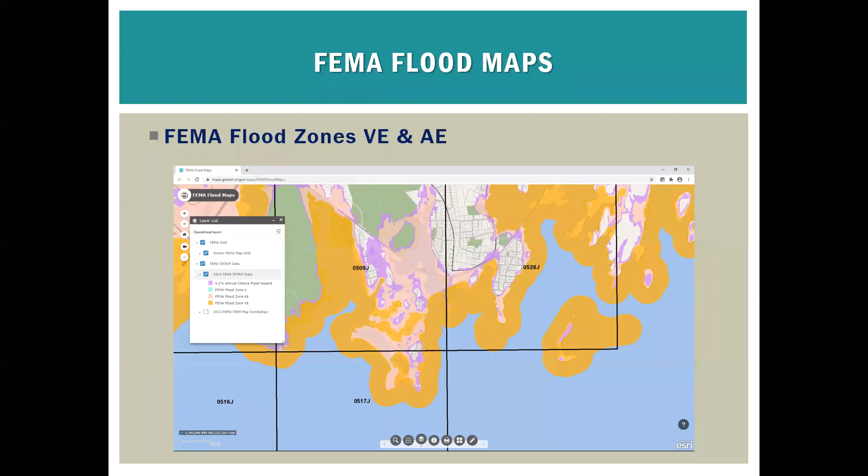You see FEMA zone VE, FEMA zone AE. So what are these things? Primarily this is Groton Long Point. Here's your Groton Long Point Bridge. You can see primarily we're in zone VE and zone AE.

FEMA zone VE indicates a coastal high hazard area. It's inundated during the 100-year flood and is subject to high velocity water, including waves with wave effects of 3 feet or greater.

On FEMA's maps, the elevations given reflect a combined influence of what we call a still water flood elevation and wave effects. So when you look at the FEMA map and it says elevation 12, elevation 17 in these VE zones, that includes wave effects.

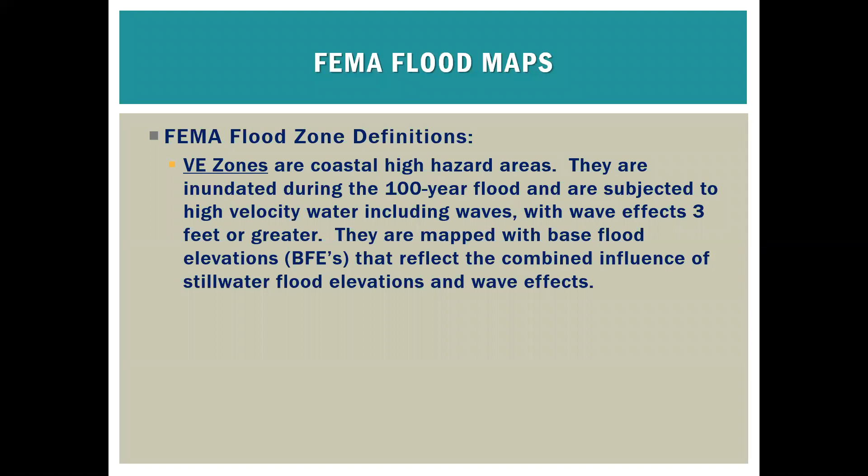Zone AE generally extends from that VE zone inland to the limit of the 100-year flood from coastal sources. Zone AE is also subject to wave effects, but less than 3 feet, and the mapped elevations do not include wave effects.

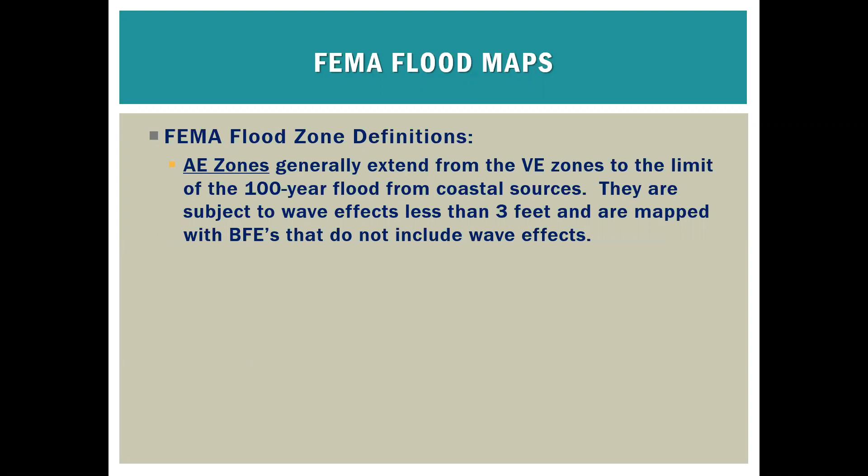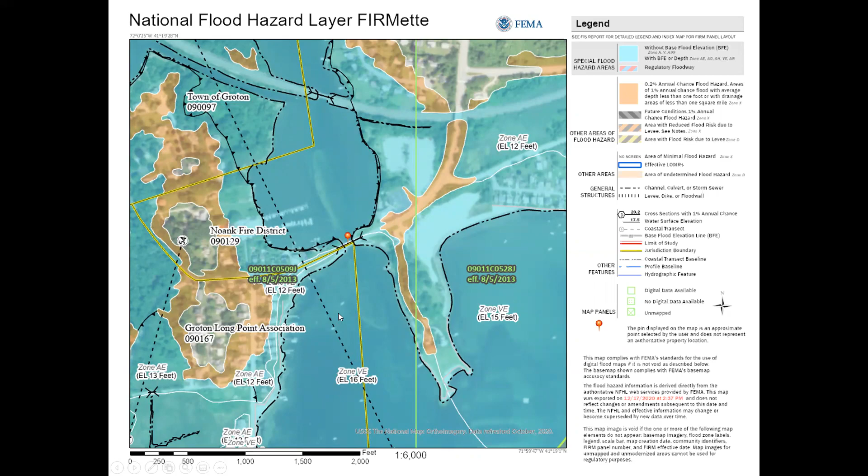So this goes toward our hydrologic and hydraulic design criteria. Since we're looking at federal local bridge program funding for this project, we'll have to use CTDOT design criteria. Going into the CTDOT drainage manual, the design criteria is based on the size of the watershed. In this case, that's just over 4 square miles, which makes this an intermediate structure, and it has to be designed for the 100-year return period.

The requirements are for the 100-year flood, which is like the still water elevation, and does not include those wave effects. They're looking for 1 foot of freeboard for the roadway. Freeboard is the distance from the top of the water to the top of the roadway. And they're looking for 1 foot of underclearance for bridges, which would be from the low point on your bridge to the top of the water.

This typically leads to kind of a perched condition for a bridge, where the bridge is up higher than the rest of the roadway. So if you satisfied the 1 foot underclearance, you've got the 1 foot freeboard taken care of at the bridge. Now your roadway may dip down further on the approach, so typically you might have kind of a hump of a profile where the bridge is up higher than the rest of the roadway.

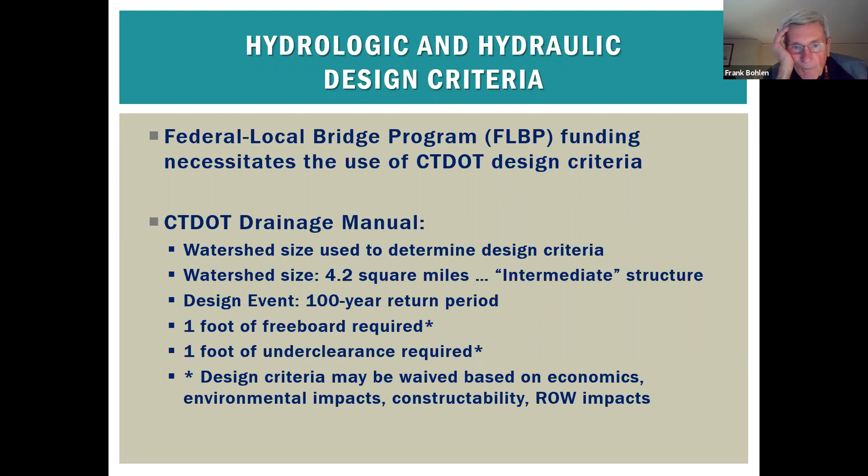There's no mention made so far of sea level rise. I haven't, but I will talk about that later on. It's important to note that the design criteria can be waived based on economics, environmental impacts, constructability, and right-of-way impacts, which are going to come into play here.

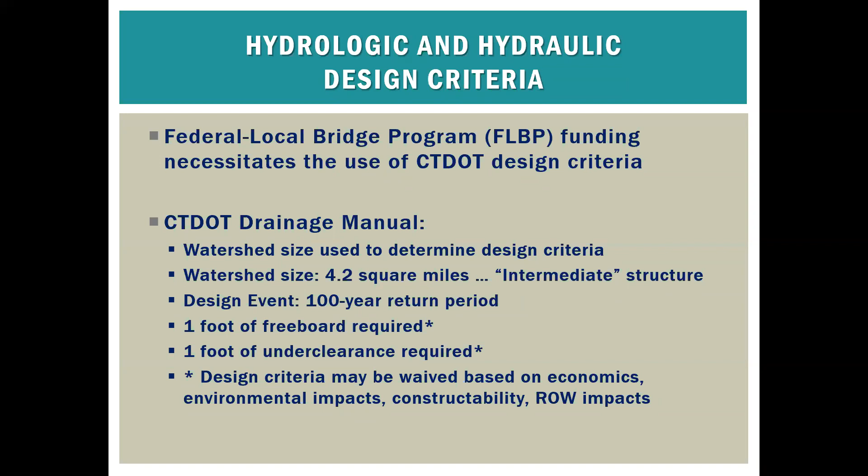Looking at the latest flood insurance study, the 100-year still water elevation is at elevation 9.7 at the bridge. That would be your control for freeboard and for underclearance. Wave height is over 7 feet, and peak wave period just over 5 seconds. Those come into play for the causeway riprap protection. They don't affect the bridge design or the clearances.

The recommended sea level rise from the Connecticut Institute of Resilience and Climate Adaptation is 20 inches by 2050. They have kind of a graph of projections, some conservative and then more and more unconservative. The end result is this is their recommendation, 20 inches by 2050.

That's a state requirement now, isn't it, John? It's a requirement to consider sea level rise. It's my understanding that the state of Connecticut requires designs to accommodate 20 inches of sea level rise by 2050. Yes, there is an act, by law, or an act, whatever it's called. Yes, there is an act.

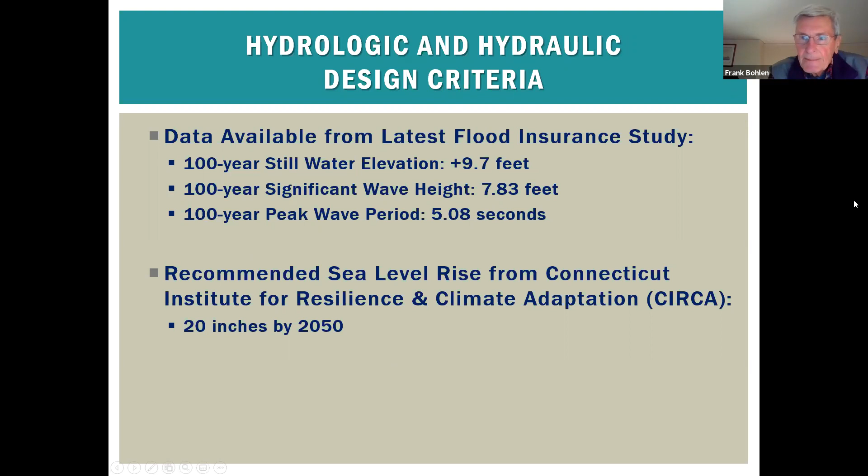And are all the elevations NAVD 88? Yes, these are NAVD 88. Thank you.

Okay, going into our concept plan development. As Greg mentioned, this project has been around for a bit. We wrote a type study back in 2013. At that time, we considered different options for the bridge span length and the sidewalk configuration.

At that early time, it was thought that a superstructure replacement might be the best option, because it was an economical option. So in 2015, we followed up with a type study that further developed the superstructure replacement options. But notably, a superstructure replacement, which would set the structure on the existing abutments and just replace the beams and the deck, would not meet the hydraulic criteria we were discussing.

Generally, a superstructure replacement would be waived from that criteria. But it would not give you the resiliency that you are most likely looking for, because you would not be able to pick up the low chord of the structure. You would not be able to do much with the profile of the causeway.

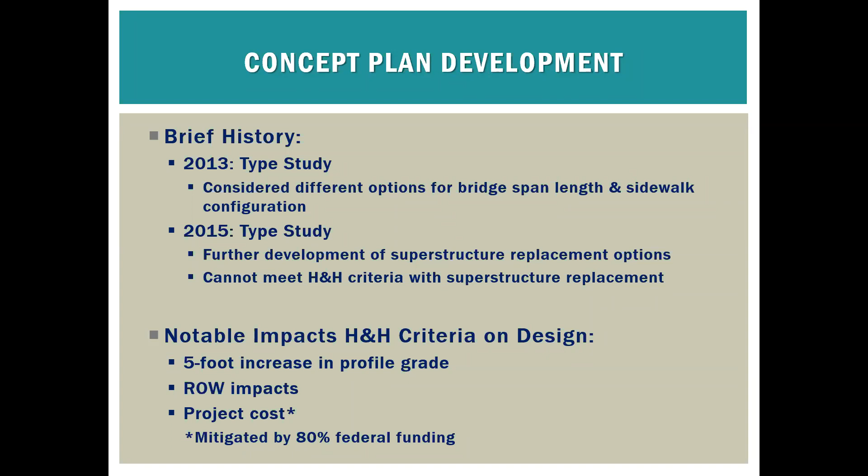So taking a look at the concept plans that Jim was working on here. These are the project limits, going from East Shore Ave on the west out to the beach here on the east. I know the picture is a little small here.

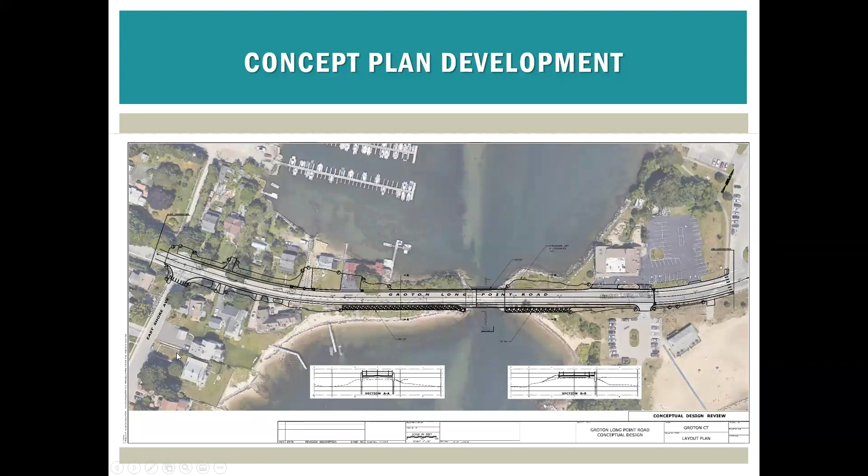We did have a profile to go along with the plan view. The upper line here, which I know it's not very legible, is the proposed grade. This lower horizontal line here is existing grade. And the difference between the two at the greatest difference is on the order of 5 feet.

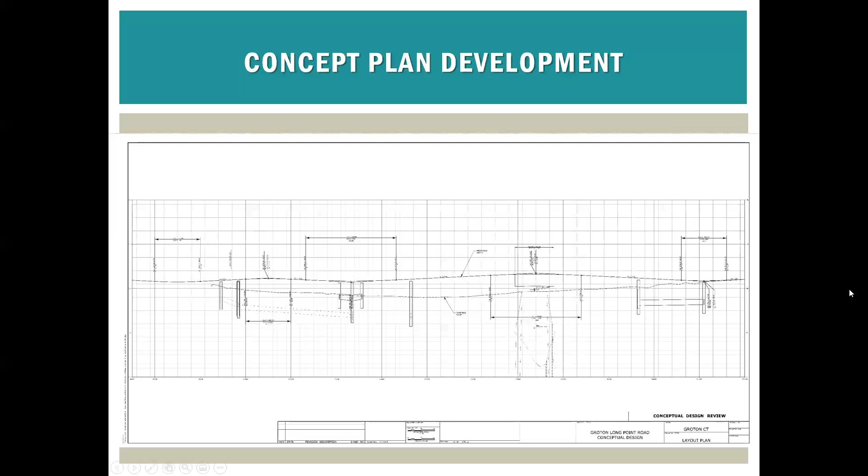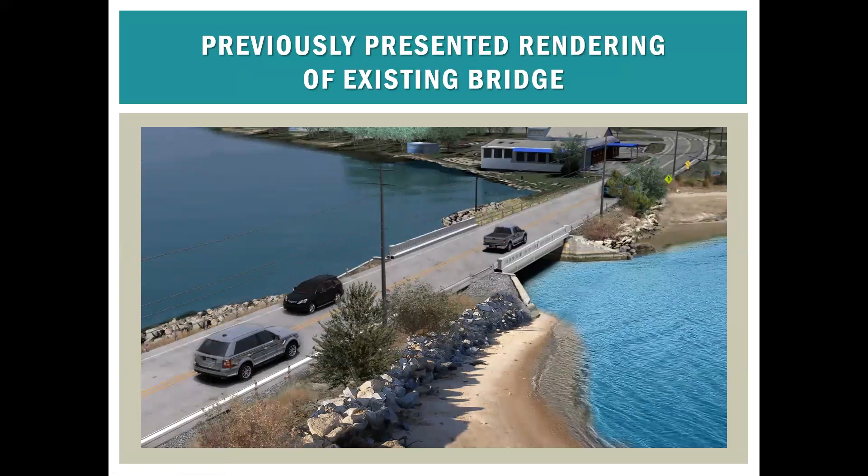I just want to take a quick look at the renderings, because I know you've seen these in the material that Jim's presented in the past, where this is the existing bridge. And he had shown this rendering of the proposed bridge. I just want to make it clear that these renderings were done before the profile had been advanced to incorporate the resiliency criteria. This does not show a 5 foot increase in profile grade.

So your condition with that change in grade would be much more of a perched structure. You have a much larger crest vertical curve going over the bridge here.

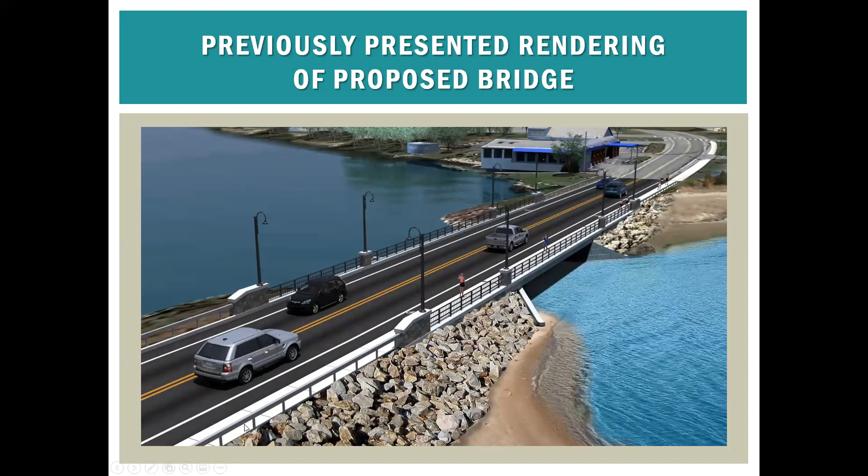This is a typical bridge section from an earlier type study. It's just showing that we would be adding a sidewalk on the bridge, similar to what's shown here. Now, how far that sidewalk goes toward Groton Long Point is up for discussion.

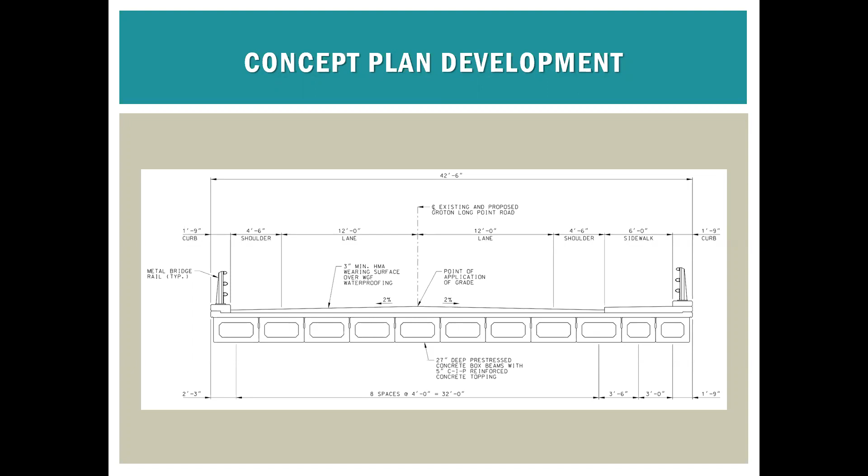But it's important that you incorporate the sidewalk on the bridge because that gets the sidewalk funded through the program. Otherwise, you get a separate sidewalk bridge, as had been discussed some time ago, that would not qualify for federal funding through the program, that 80% funding. And that bridge width does increase a bit.

That helps you with the stage construction while you're trying to maintain at least alternating one-way traffic during the first stage of construction, when you're removing a portion of the existing bridge while maintaining traffic on the existing bridge, building half of your proposed structure, shifting traffic, alternating one-way traffic onto the proposed structure, and then completing your new bridge.

We had shown early on a temporary pedestrian bridge. Whether you choose to maintain pedestrian traffic through this location during construction is a town decision. I will point out that the length of the section where you're going to have alternating one-way traffic is on the order of 300 feet. So if someone is walking along that roadway with the alternating one-way traffic, it's a bit narrow not to have some type of pedestrian accommodations. Again, that's a town decision.

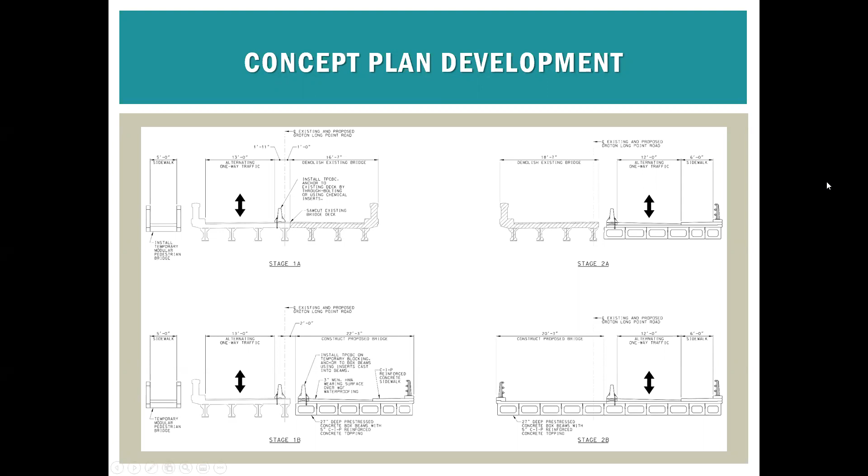So looking at the next steps, I think we need to make a decision about the causeway profile, knowing what the profile implications are, and maybe we can discuss those a little bit further. But we have to decide whether we're going to try to meet the full CTDOT hydrology and hydraulic criteria, or pursue a waiver for some of the criteria.

For example, you may decide that as long as the causeway and the roadway are dry, you don't mind if the bridge is under pressure flow, where the level of the water comes up above the bottom of the girders. So that type of middle ground decision would let you decrease the right-of-way impact a bit.

And that's kind of a major decision that I think will come out of this task force committee. Once we make that decision, then we can continue with the preliminary design, construction cost estimate, hydrology and hydraulic reports. And then you can move on with your referendum process and your federal local bridge program application, because you'll have a good handle on the construction costs and the coordination that's going to be required with ConnDOT, specifically the hydraulics and drainage people there who you'll have to get the buy-in from if we're going to try to waive some of their criteria.

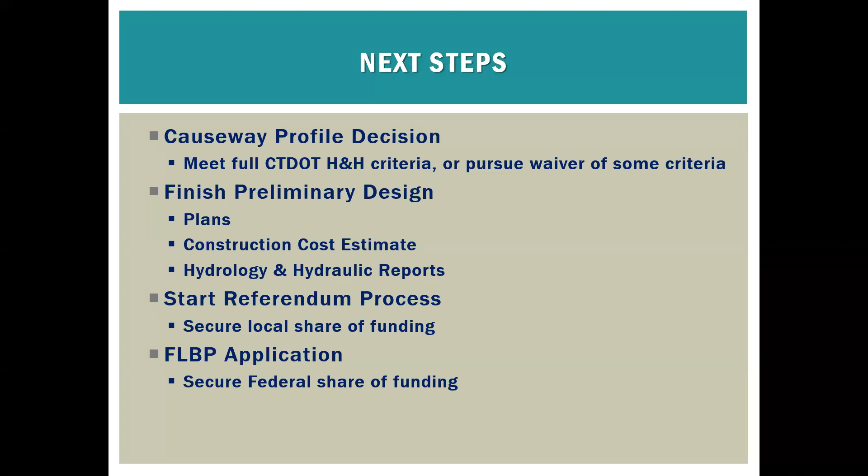And looking again at the timeline, we were looking at finishing preliminary design in 2021, and then moving on with your referendum process. And this hasn't changed. That timeline is still fine. So I just want to point that out. There's no reason on the design side for any type of delay, as long as we can make some decisions on this critical layout item. So with that, I'll open it up to discussion and any questions that anyone may have.

John, I don't know if you have it there or not, there's a March 17th, 2020, all the elevations for the existing and proposed bridge, proposed causeway. I think that gives kind of a good picture of what you're talking about. It's from the last task force meeting. I might have it if you want. I can. I believe I have it from the last presentation.

So I have a few questions, Greg. Yep. I may not have heard, I'm sure I didn't hear. What's H&H? Hydrology and hydraulics. Oh, I should know that, right? Never heard the term. Okay. That's what they refer to it as, so I'm trying to be consistent.

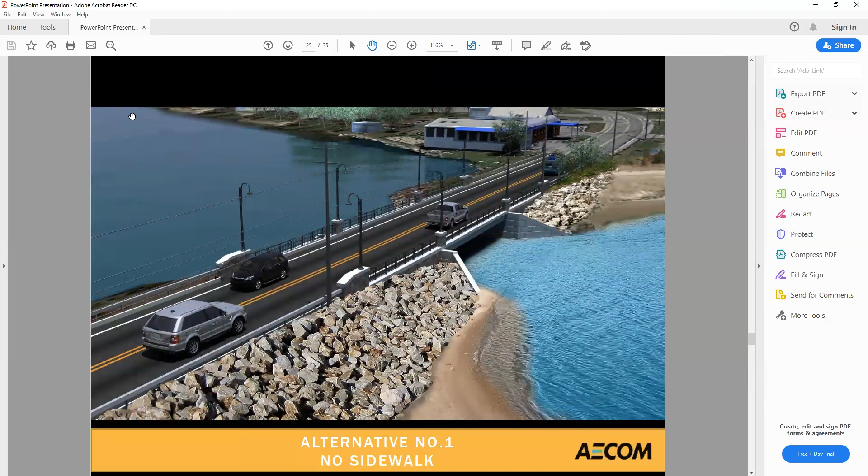Can you see this on my screen? Yep. Okay. Right. Oh, yeah, that one, exactly. That's the one, with a separate pedestrian bridge. You know, a lot of times people like this boardwalk kind of look. But this isn't really showing a structure holding up the ped bridge, but there's got to be structure under here. And if you want that pedestrian bridge structure to be funded under the federal local bridge program to get that 80% funding, it has to be part of the bridge for the roadway. They will not fund a separate ped bridge.

Right. And another detractor to this alternative is that the town would have to maintain that boardwalk. It looks like a maintenance headache to me, and I don't have to maintain it. I may have to pay for it, but I don't have to maintain it.

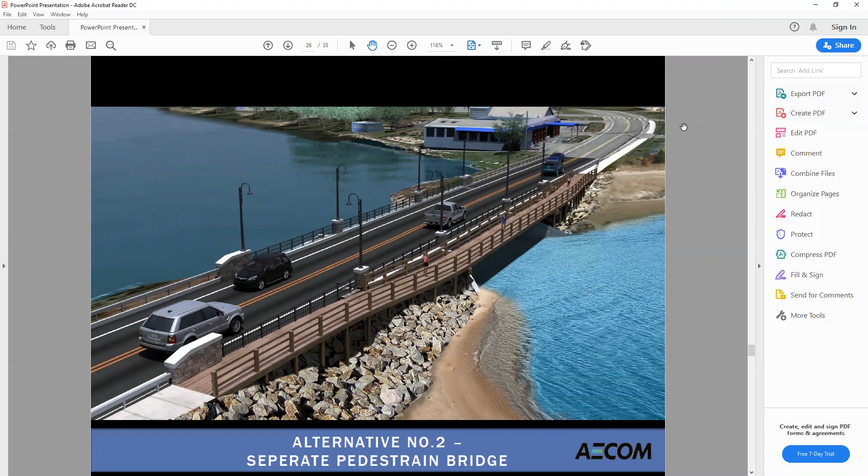And also, one thing that you want to have in this somewhere as you present this, we're talking about a design life of something around 100 years, right? Yes. I could be wrong. Federal criteria is at least 75 years for a roadway structure. Right. The old one's been in there quite a while. So we're looking at something like 100 years, and 100 years of a wooden structure is iffy. That looks fine.

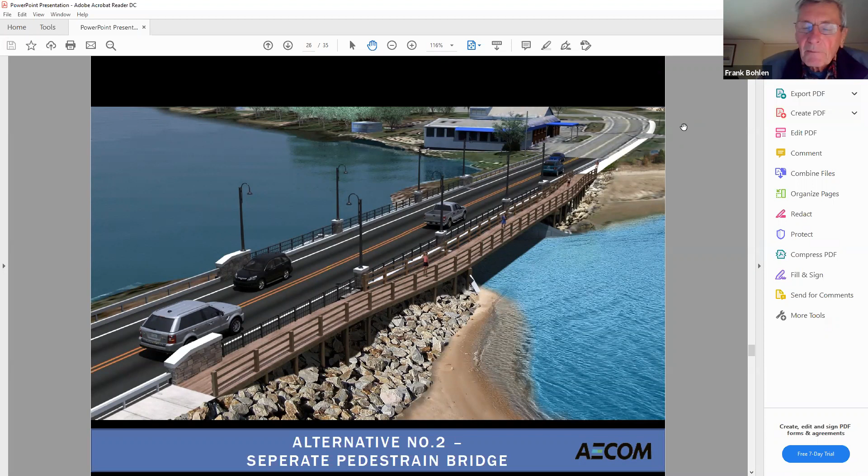Now, it was not clear to me. Let's go back to the one you showed me. When I looked at some of the paperwork, this road is quite a bit wider than what's there right now. Not just a small increase. Is it 10 feet, 25 feet? More than that. You got a sidewalk, you got what look like two bike lanes, and then you've got something like 30 feet or so of roadway out there. So it is quite a bit wider, right? Yeah, incorporating the sidewalk does cause quite an increase in the width. We're looking to bridge over the existing abutments and support the new structure behind them.

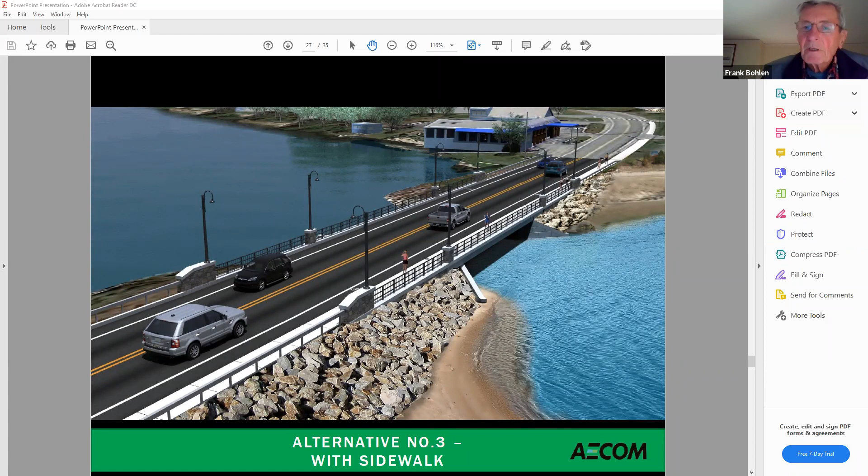I think this rendering was created to convey the look from the roadway, and it doesn't really convey the support of the structure accurately. I'm going to try to go into my material here and see if I can answer your question on the width. And if I recall correctly, when Jim presented this, he was also presenting something about the supports, and that the new bridge would require different support mechanisms, a different support structure, right?

So our intention would be to remove the existing deck and beam and cut down the abutments to an elevation we'll have to decide on, but say where you can see where the water line is on the existing abutment here. Mhm. That's just the tip from the typical tidal water. So that's probably your high tide line right there. Yeah, it is. And we'd like to cut the abutment off probably at that location, so when someone is coming through here from the marina, they can at least see the top of the existing abutments and not hit them with their boat.

And then we'd build new abutments behind the existing structures, so we don't run into the existing foundations. So that's going to require a span length over 80 feet, somewhere between 80 and 90 feet, which you're going to be back here with the proposed abutments. So then the new bridge will be longer than the existing bridge.

Right. Now, talk to me about the underbridge clearance. I heard you say initially, or at least I thought I heard you say, that that was required, a foot of clearance at storm level elevation. Right. Is it required or desired? Well, the way that the CTDOT hydraulic and drainage manual is written, they say it's required, but they say the requirement can be waived if it's unreasonable to meet the criteria based on economics and right-of-way and environmental impacts. So if you don't have a substantial reason why you can't meet that criteria, they will enforce it. Do we?

You could argue certainly that when you look at the cross sections and you look at the property impacts, I'll go back here on these nearby properties, you're trying to increase profile grade by 5 feet in this area here. And you look at the slopes and how far these slopes come on these properties, what the grade of the driveways become when you are picking up the profile that much. You could certainly argue that you're impacting that property so much that it's not reasonable to provide that underclearance. Right.

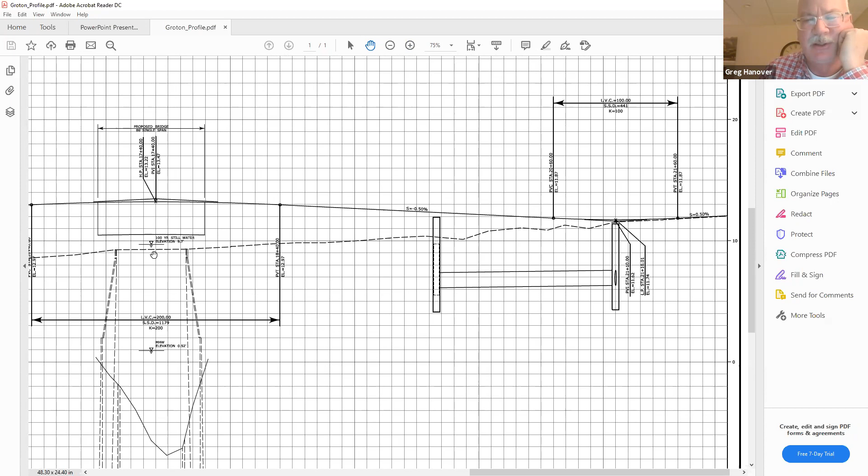I can open up a better view of that profile here. It's around 9.2, I think. Say again, Greg? It's around 9.2, the existing bridge. Yeah, so that might be a little low for the 100-year storm. Yeah, because 100 years, 9.7. Right. Yeah, the low point is actually in front of that house that he was just showing. Yeah, it looks like it's close. Yeah, certainly within a foot of being dry.

Because of course, in our consideration now, the resiliency task force considerations, we were looking at the wet on either side in 100-year, and talking about raising road elevations all the way along to accommodate the 100-year. But of course, recognizing that, we got a nice dry road now from beyond the Fisherman Esker Point over to the stop sign going into Groton Long Point. And at that point, you go uphill a little bit into Groton Long Point. It's relatively dry into the pond on the other side in the 100-year flood, as you showed. So

the roadway elevations in this area is an interesting one. When you showed me that picture of a 4 or 5 foot elevation, and you showed me blacktop that sort of ended maybe short of the fisherman on the east side, I was thinking about why, beyond the cost, of course, it wasn't extended further east and the same thing further west. But of course, the properties, particularly on the west side, are certainly a consideration. And I'm sure they'd feel that way.

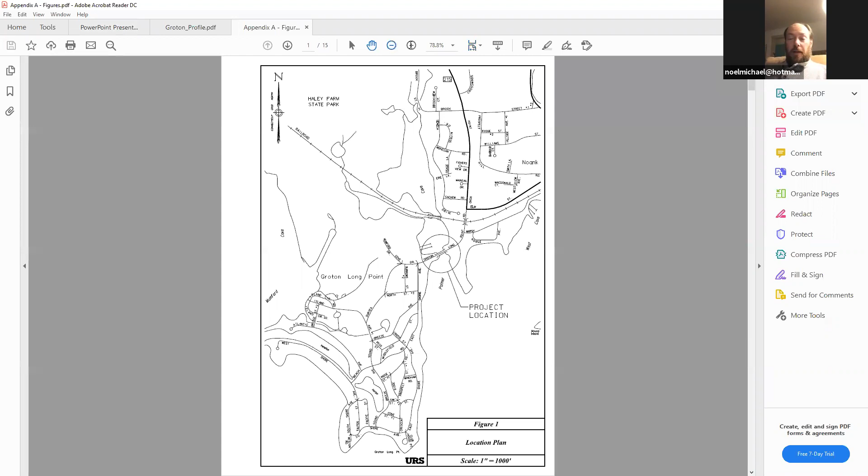Okay. I see Noel Michael has a question. Hi, Noel Michael here. I also echo Andre's recommendation for the sidewalk. It'd be nice to have it on the south side, extending all the way to East Shore Road there, Groton Long Point.

I also had a question about the width of the passage of water under the bridge. If you put the new supports out wider, what did you say, 80 feet? Weren't we talking at one point about increasing the water flow through there? So wouldn't it be a good idea to remove the old abutments after, just to make a better flow situation? That's all, just a comment. Well, I can discuss that.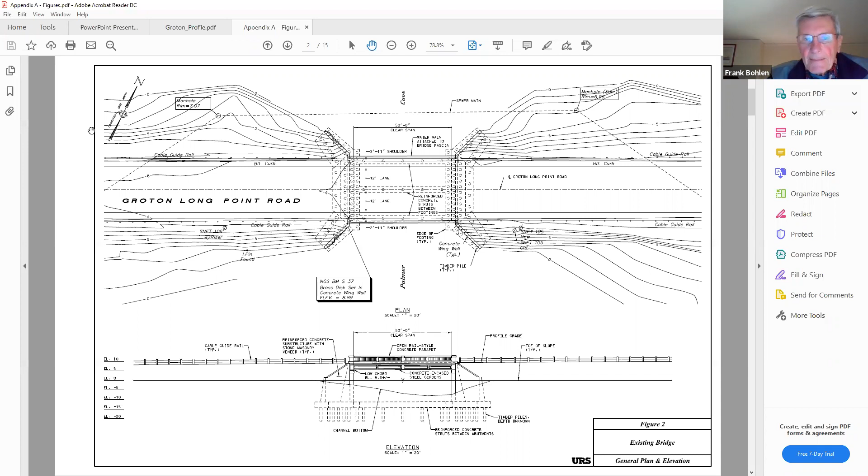To what extent is the finished channel width going to be determined by the hydraulic studies you're about to perform, right? Why wider? I don't think that there's a hydraulic need for a larger opening. I know that the concern with possibly opening this up before, as is shown in this study as an option, was we were looking at even a 3-span bridge. There was concern about wanting to flush the cove, so to speak. And I remember at the time there was also a competing concern. I think there were oyster beds in the cove, and some people didn't want it to be flushed. So I know that there are thoughts both ways, and the easiest route is probably to leave it as close as possible to what it is now.

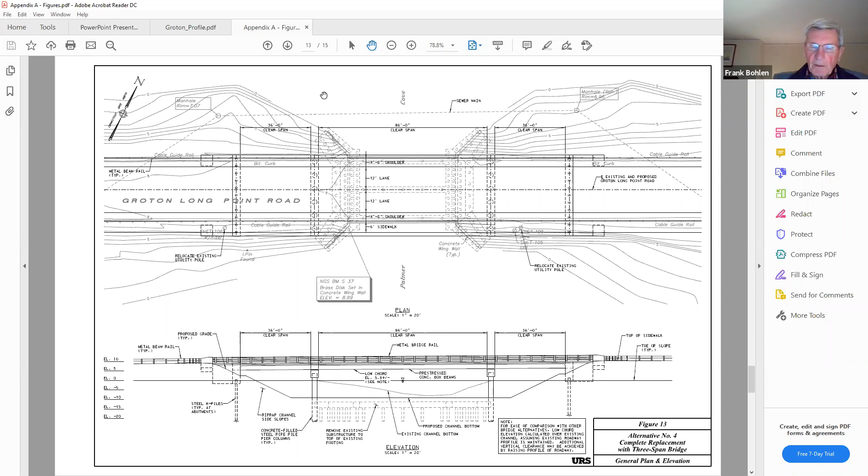But you're making it wider, right? Well, we're building the proposed abutments behind existing. Yes. It ends up being a small change. It would be a little bit wider. You're still gonna have some kind of riprap protection in front of them, even if you remove the existing abutments down as far as you possibly can, which would be, I would say, not below the existing footings.

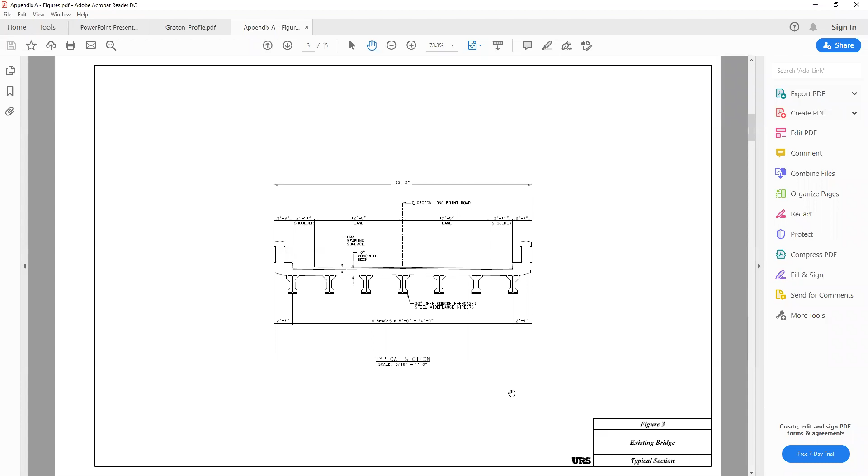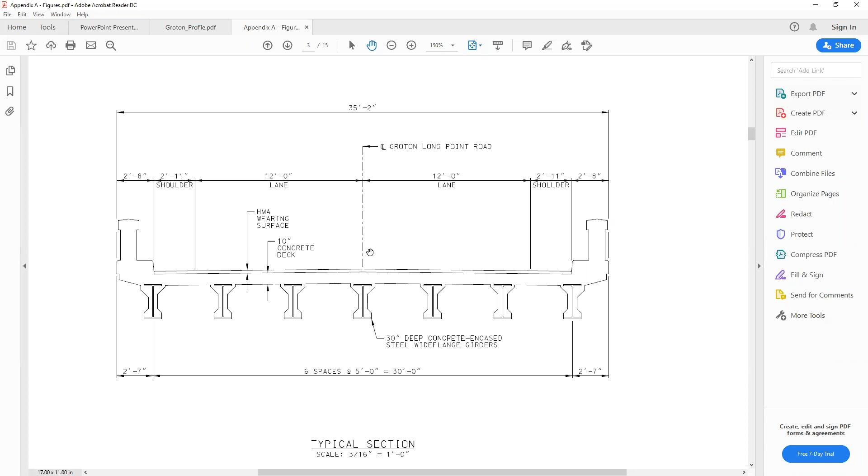And to go back to that question about width, here's the existing bridge. So right now, I believe we have 12-foot lanes and almost 3-foot shoulders. So there was a small increase in shoulder width on the proposed bridge. I think we were up to 4'6". And then we did have the addition of the sidewalk. So it's 35 foot 2 inches out to out now. And on the typical section that I showed you, which was from this early study, 42'6".

If you incorporate bike lanes, typically they're recommended to be 5 feet. If you had a 5-foot bike lane, or even let's say a 4-foot bike lane and a 2-foot buffer, and say an 11-foot lane instead of a 12-foot lane, it's 11 and 2 and 4, 17 foot. Okay. You got a 34-foot wide roadway. Going to bike lanes is going to put you a little wider. If you didn't have the buffer, or you could stripe it differently, I guess. You could stripe it as a bike lane instead of as a shoulder. Just add the bike markings. There are options there. We can work with you on that, but it's gonna be wider.

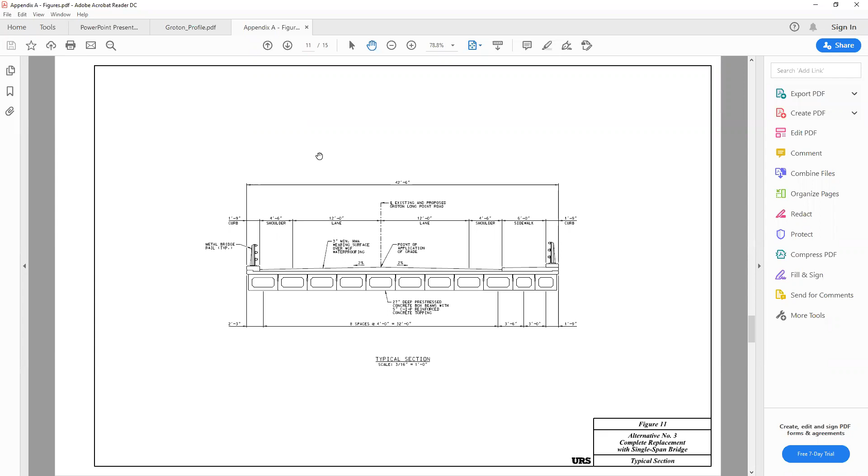So John, did you have that elevation sheet? I think you pulled it up real quick. I saw it there. It should flick by.

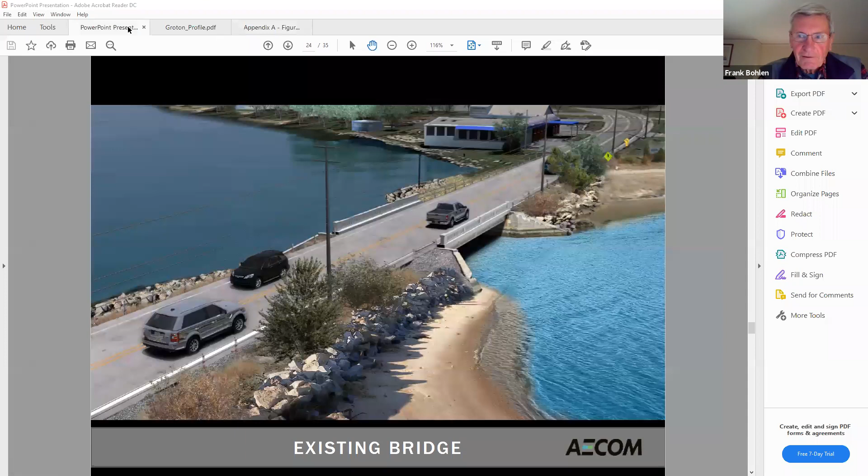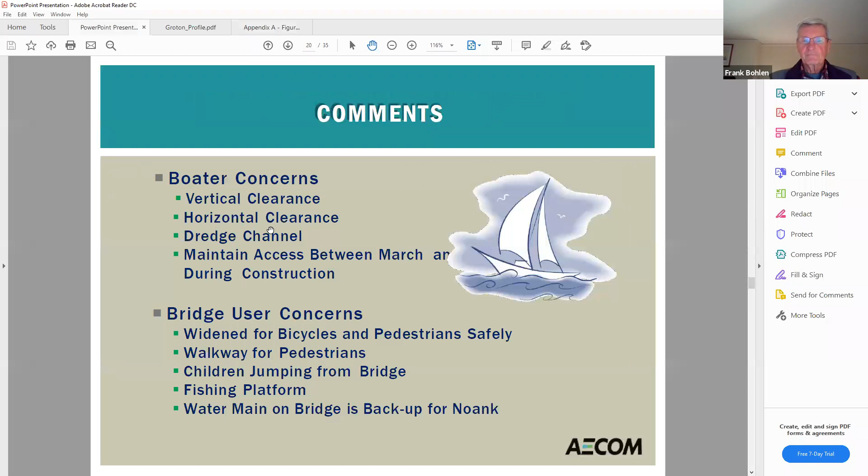Existing bridge with 50 feet. Yeah, proposed bridge with 86 feet. You're gonna have to forgive Jim for that one. He's talking about length. That's the span. It took me a while, Frank, to figure that out too. It's the width if you're a boater, I guess. Yeah, okay. I don't know. Okay. So yeah, that's not the width.

You know, I think without getting too much into the elevations, the most important thing I think is how much profile grade is coming up. That 5 feet. 5 feet is a substantial increase in profile. We're talking about having a wall along the ocean side, the seaward side,

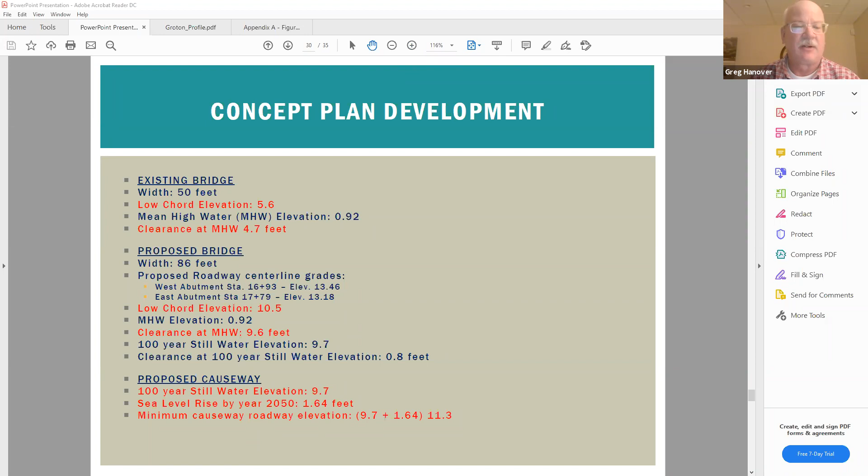Yeah, these are the first two houses on the north side as you come into Groton Long Point. Those two there, they're going to be really impacted by this elevation change. So I think it'd be helpful if you could give some cross sections or some simple illustrations to show the task force what's going to really happen there if we raise this causeway up to 11.3 feet.

Yeah, I have seen an early cut at that, Greg, from Jim, but I want to take a closer look at it. I'm not sure that the profile comes up far enough to incorporate the structure depth that we need, and I'd like to look at it a little closer before we present it. Yeah, I think it's just those first two on the right, on the north side as you come over the bridge. I think the rest of them was fairly minor grading.

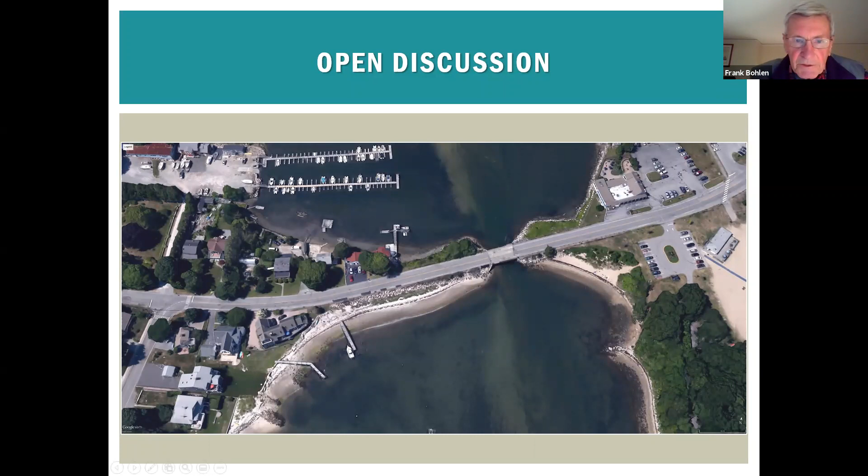Right. But of course, those two houses in the 100-year flood are probably going to be underwater. Underwater, exactly. So they might also be thinking about raising house elevation at some point in all this. Can we drop back to that slide you had with the text on it? I'm not clear on a couple of things. That guy. The low chord.

Bottom of bridge. The bottom, that's what I hit my head on when I go under the bridge, right? Okay. So where did you decide that you needed clearance at mean high water of 9.6 feet? I think when Jim worked this up, he was looking at that 100-year still water elevation of 9.7. No, hang on. We're not there yet. What I understand is under normal circumstances, at an average high tide level, I'm going to have 9.6 feet.

If my feet are in the water, just in the water, I got 9.6 feet up. My 6'4" head is not hitting the bridge, right? So I'm just explaining how Jim got there.

That's under a high tide situation and not under a flood situation. Exactly. Mean high water. Yeah.

Where did 9.6 come from? The size of a boat? No, the 9.6 wasn't a design criteria. The criteria was being 1 foot above the 100-year flood elevation, which I'm not sure why he had 10.5 if the 100-year still water elevation was 9.7. Low chord should have been 10.7.

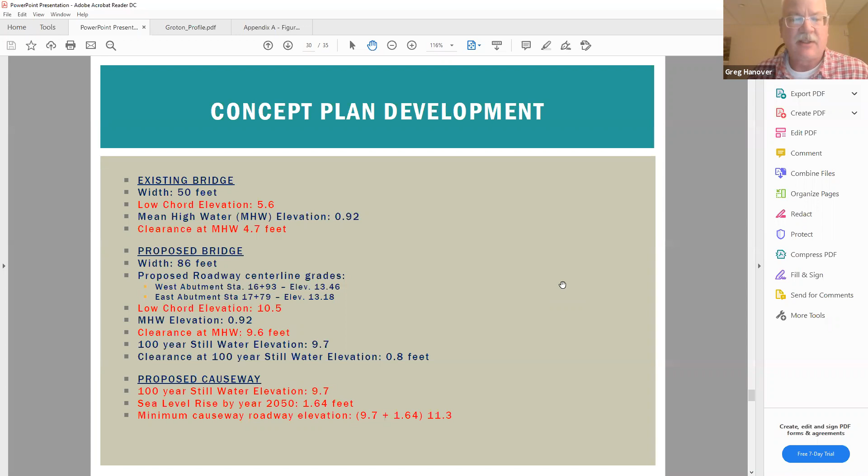So the feds will rely on ConnDOT to administer the project and to make decisions about waivers of design criteria that would apply to design speed, that would apply to meeting your drainage manual criteria. You'll still be able to get funding if you don't meet that 1 foot of underclearance, because we decide that the right-of-way impacts are too high and that the cost is too high. So you'd have, we could give you some cross sections that I think would support that.

Okay, and probably some rough costs. Costs of wall, your additional wall, your additional height of abutments, your additional causeway construction. You have the difficulty of staging your alternating one-way traffic while having a 5-foot difference in elevation between the existing road and the proposed road.

See, Andre, you have a question? Yes, do we have a deadline as to when we need to determine the elevation of the road? Well, I think that the schedule that we had set up, I'll go back to that.

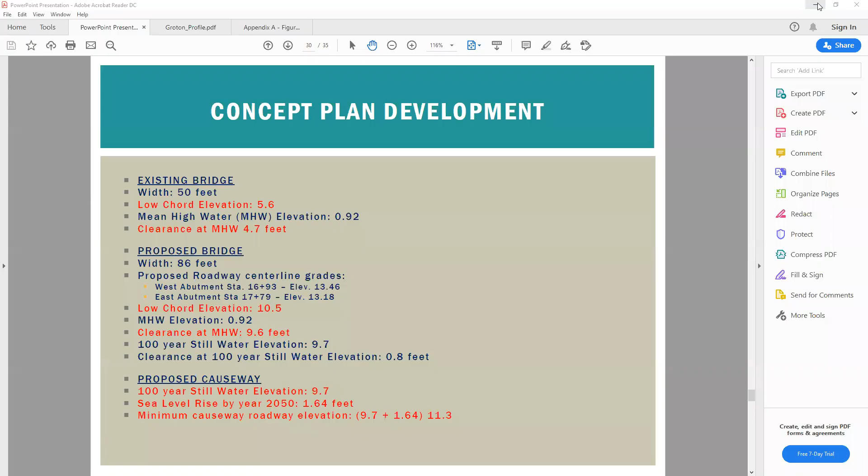I don't want to put you on the spot, Greg, but in your discussions with Jim, I think this referendum process took a certain amount of time, and probably worked back to this May. Yeah, if we do a referendum in November '21, we need to start the process with the town clerk and bonding attorney in May of '21 to give us enough time to be on the ballot. So that's where that May date comes from.

So before that May date, you need a better handle on the costs. Yeah, we need to get a definite cost of the project. For that we need to go through the design process, and I can't really assign a deadline, but the sooner the better.

That decision on the profile of the causeway can't come soon enough for us. Yeah, that's why we wanted to discuss that topic mainly tonight, and probably the next meeting too, so we can give our design team something to design to meet the schedule.

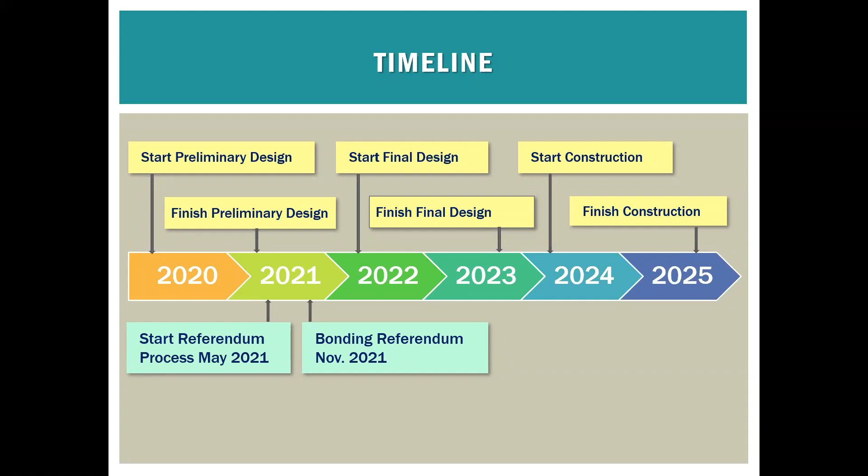One last question that comes to mind: is there any consideration for differences in structural loading that might result if we bring the bridge down so it's more likely to be subject to wave attack in an extreme event? I could conceive of bridge construction more sensitive to being hit by waves, and less sensitive. It must affect the overall cost of the operation. Any consideration for loading effects on this?

The structure type we're looking at for this clear span over the existing abutments is called an integral abutment structure. I don't want to get too technical, but the beams that support the bridge deck are tied right into the abutments.

Rather, your existing bridge, which is very heavy because you have those concrete encased girders, is supported on bearings, so there's kind of a joint there where the superstructure is connected to the substructure at that location.

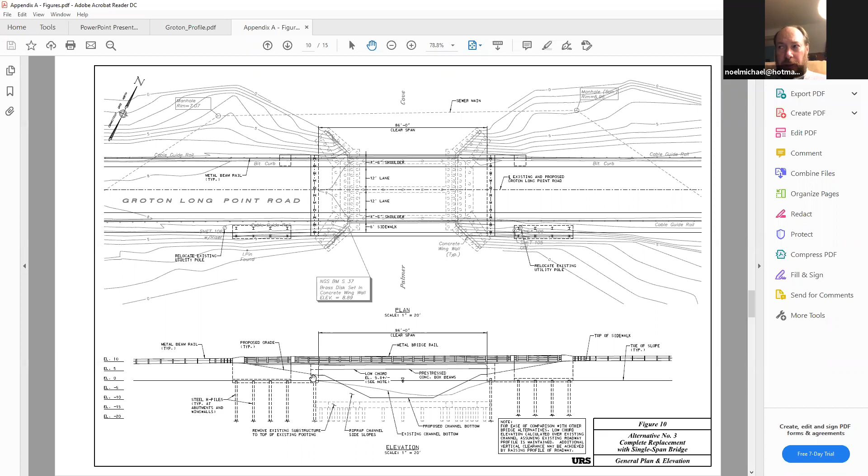Okay, Michael, you have a question? Yeah, so just wanted to get clear: for next month, you're going to have basically pictures showing the grading and how it relates to the current properties, is that right? Yes, I think that's what you need to see to make your decision here. Okay, all right, thank you. You're welcome.